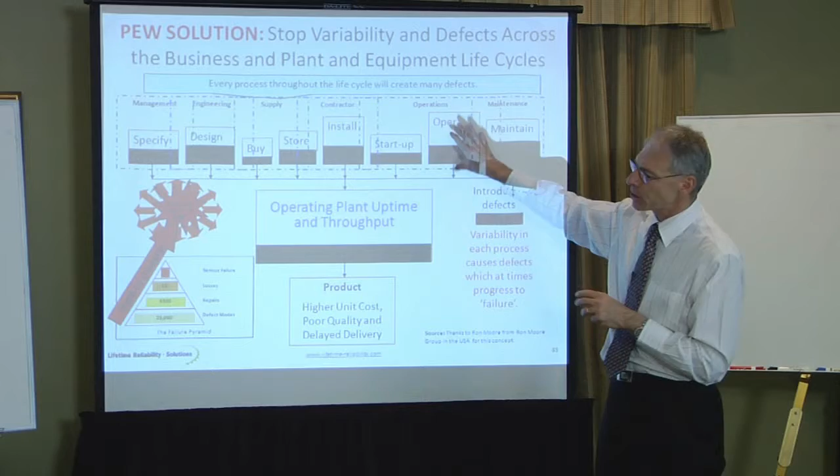We've discussed previously that human error is all around us. Business processes, depending upon the process you choose, produce a range of outcomes. Some outcomes are going to be bad, some will be good. Across the life cycle between projects, designing, procurement, stores management, installation, operating the plant and maintaining the plant, things go wrong at every single one of these processes. This black section here with the dots is an indication that defects and errors happen all the time, and these errors flow through into the operating plant because these mistakes, misunderstandings and misassumptions are in our business.

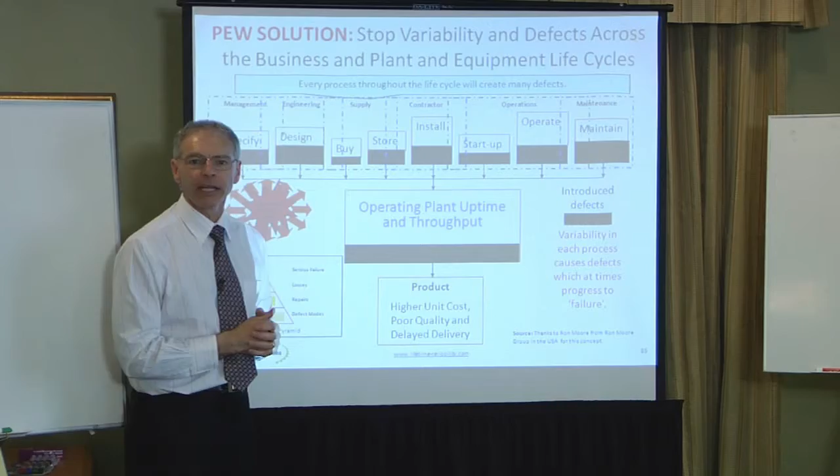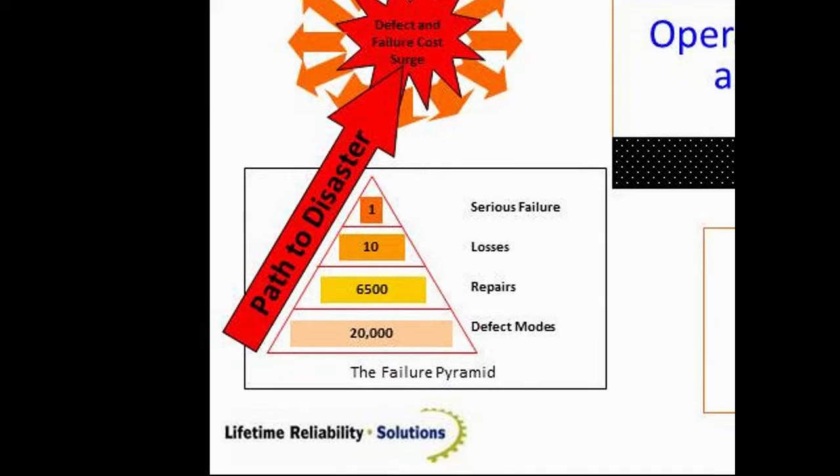Every now and again, those opportunities that they have created result in a breakdown. Some surveys were done back in the 90s on what that ratio actually is, so I want to bring this up because it's interesting to see. This was done back, I believe, by DuPont, and they had a look at the frequency of failures and the way these failures arose. This particular figure, or these pyramids, is saying that in this operation, in this plant, for every 20,000 defects, these errors, mistakes, misunderstandings, wrong selections, whatever the case is, lead to 6,500 repairs.

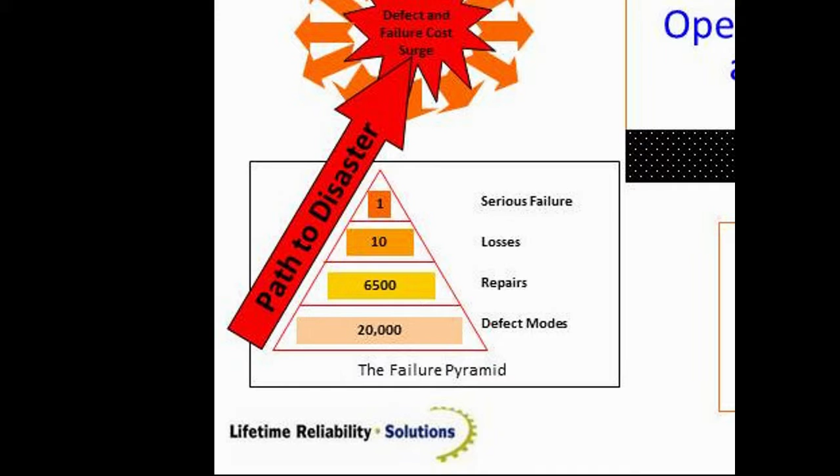So these defects cause us maintenance. Of these defects, 10 can lead to serious business losses, major financial costs above and beyond what we never want to see in a business. Some of those will lead eventually to possibly a death or a serious maiming of people. The whole point being is not every mistake, not every error becomes a repairable outcome. If this ratio is right, around about a third of the errors turn into some sort of maintenance cost and some sort of maintenance outcome.

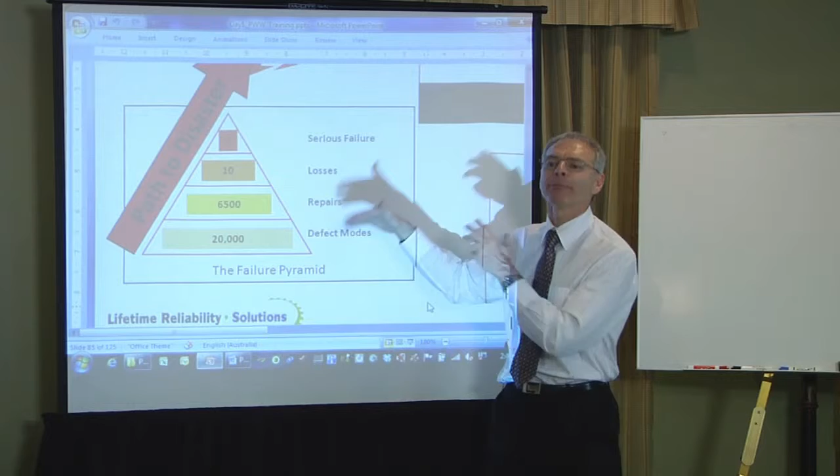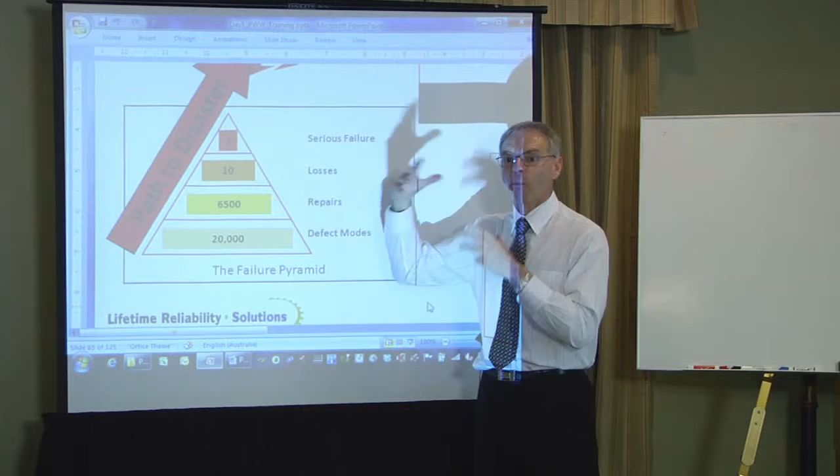My understanding, from my business, my work in industry and my work in maintenance, is that I know people make mistakes. Not every mistake becomes a breakdown, but they are sitting there waiting for the opportunity to arise. So in terms of risk, these 20,000 defects, though not all will become a problem, are always there to become a problem. It might not be today, it might not be tomorrow, but in a year's time these defects begin to show their evidence and become problems for us.

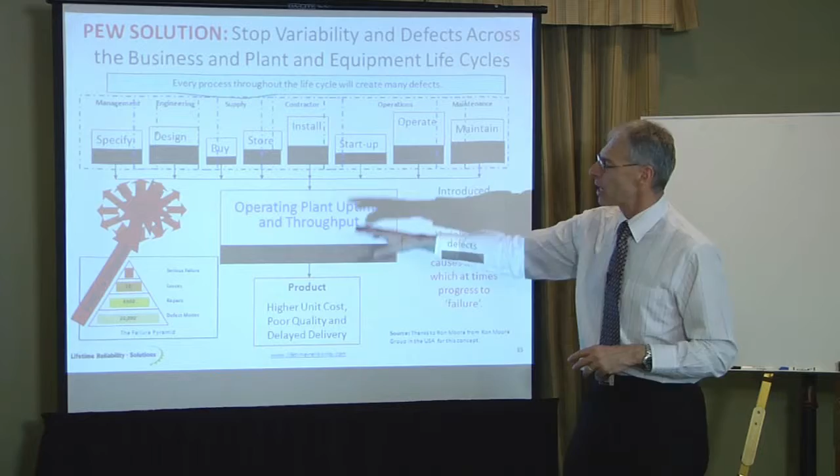They're residing in our businesses, just waiting for the opportunity to either become a breakdown and be fixed, or sometimes a severe financial loss of life and of business opportunities. And that's the life cycle. Mistakes are fed in by engineers, by operators, by maintainers, by finance people, by managers, by supervisors. These are all coming in all the time from all over the place in the company, and we want to stop all that. We want to cut that right down to the least number of errors possible.

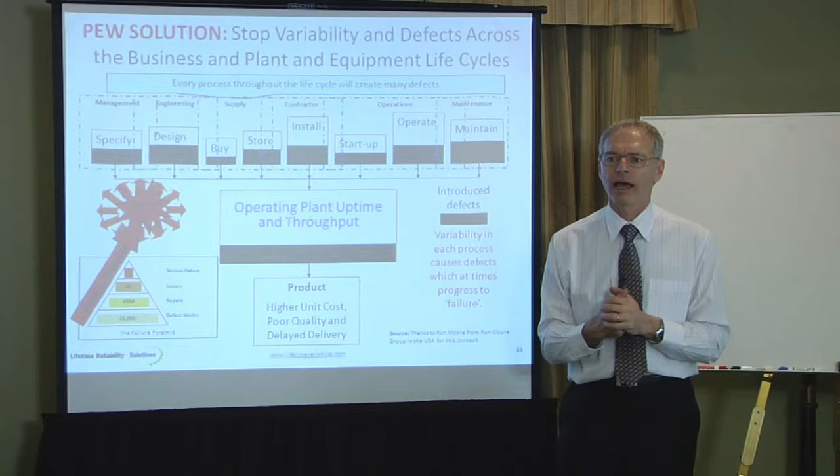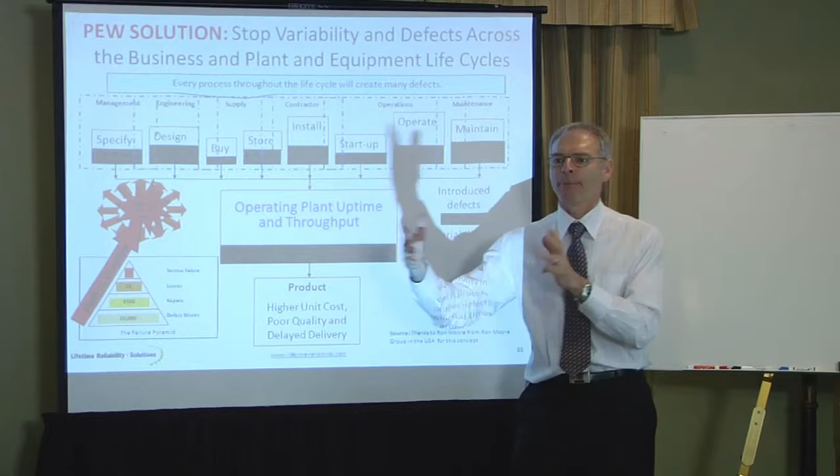So I come back to my story of Boeing. How did Boeing do that? How did Airbus do that? There's only one way to run a plane and to maintain a plane. So I don't want to have 100,000 different ways to maintain a plane. Same with the plant equipment in every other business. I can't have 100 technicians and each person maintains that pump 100 different ways, because 100 different ways will give me plenty of errors. I can't control 100 different ways to create errors.

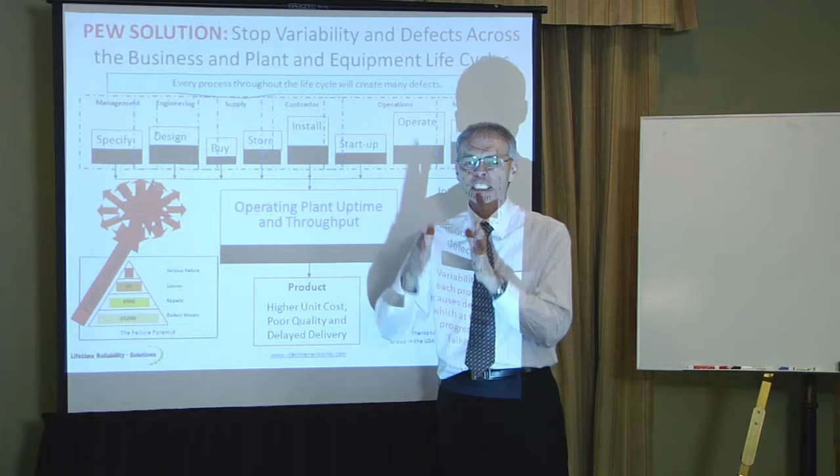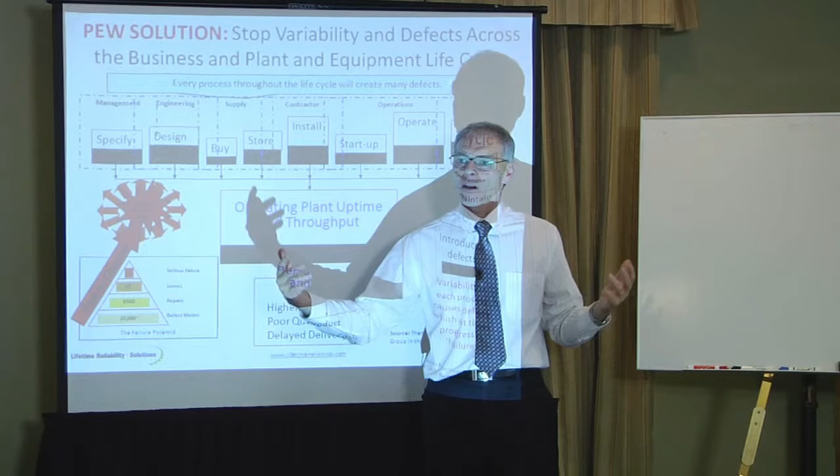So I've got to have one way only that this machine is maintained, one way only to operate the machine. Now that one way, I can find where the mistakes are in that one way and improve it continuously until fewer and fewer chances of error arise. But if I have 100 ways to run a machine, I can't control 100 ways, and I'll have forevermore troubles that just sit there and keep coming back year after year, decade after decade.

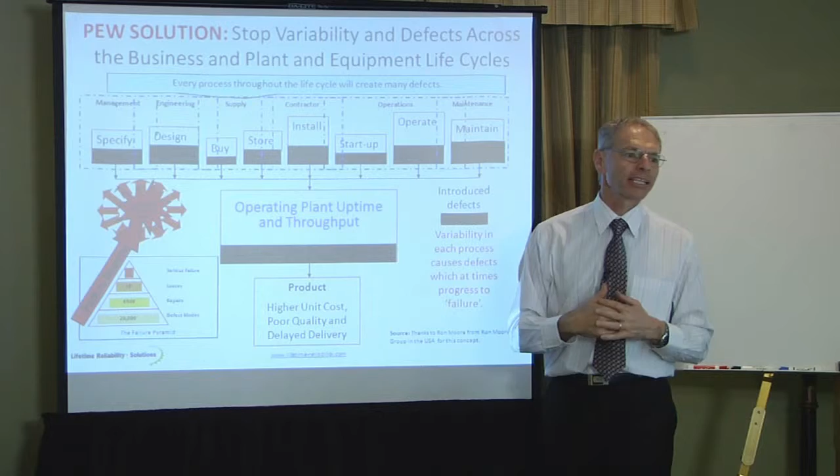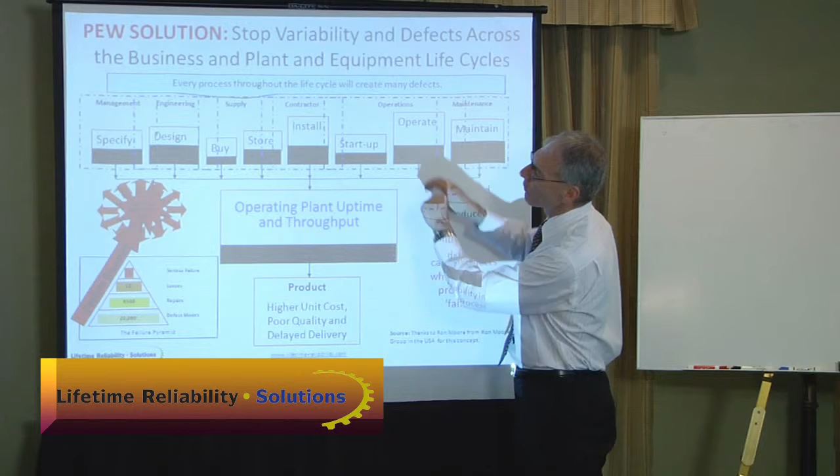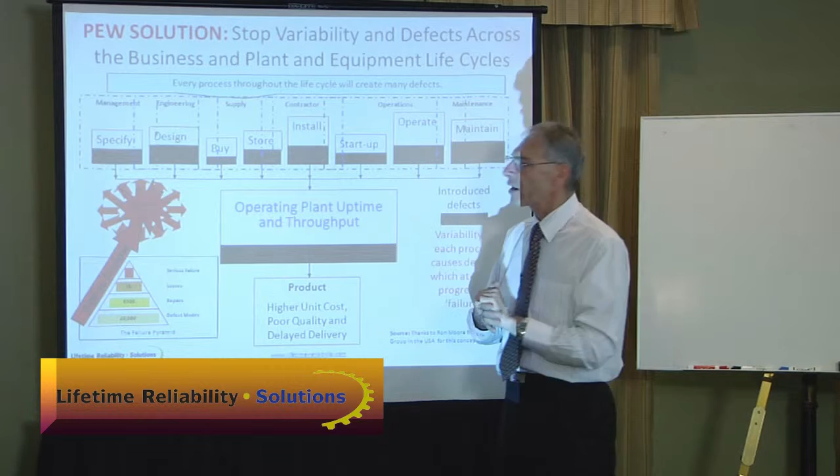And that's why I think we're still where we are today as we were 50 years ago: machines that are not reliable, businesses that fail because they can't supply customers with the quality product on time they need, because the problems have never gone away. So Plant Equipment Wellness is about understanding where the errors can come from and building a system to prevent that, to recognise them, to protect against them, and then just have one way, the one best way.

And we've got to find the best way through our learnings and through our people's input, because I won't know it right. I'll never get it right perfectly myself, but I know as a team, as a group of guys that have different perspectives on things and know different things, as a team we can add some value on this one way, and keep improving that one way.

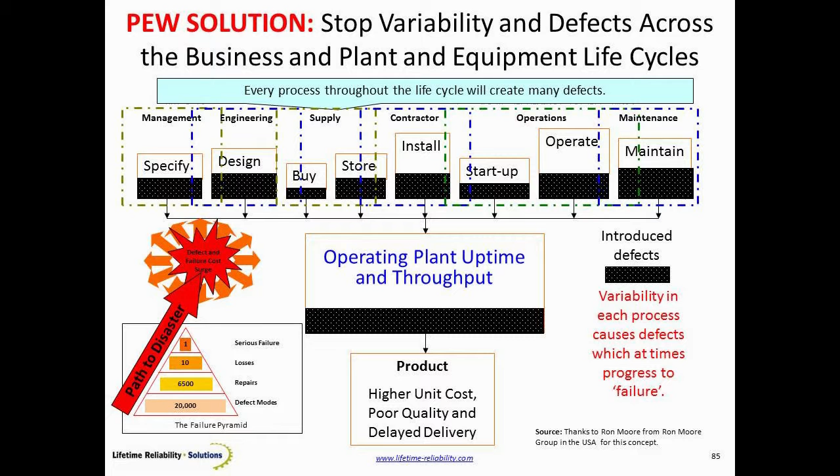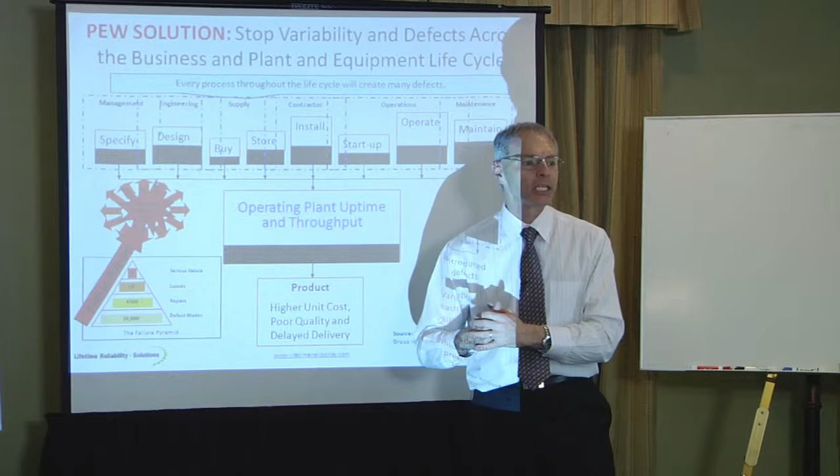So the pyramid tells us what happens in businesses. It doesn't give us an answer, but it does indicate what we've got to start focusing on. If we reduce the number of defects, then the opportunities are not there. And in our risk equation, opportunity is part of that equation. So the fewer the opportunities, the lower the operating risk. The lower the risk, the higher the reliability will result, because there are fewer things to go wrong, and then a machine runs for longer without problems, which is improving reliability.